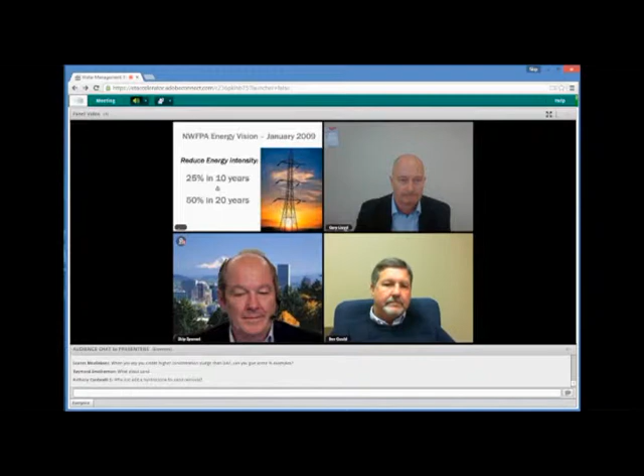Another point about NWFPA: they've taken a really bold step to say they want to reduce overall energy intensity by 50% in 20 years. That means getting double the work for the same amount of energy. This moving-less-water business has a lot to do with turning pumps less, along with moving toward that outcome.

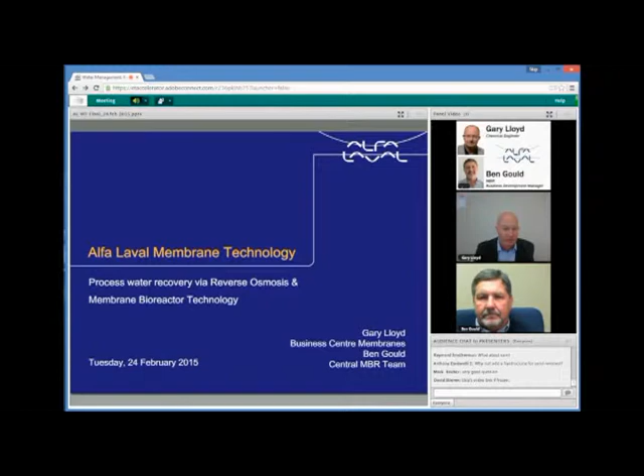Before getting into the actual process examples, I'd like to give some background on the membrane section of Alfa Laval. We actually started up just before osmonics. In fact, in 1965 we were one of the first pioneers to bring membrane technology modules and systems to the world. At that time, it was well before spiral technology was available — it was plate and frame technology. We later became part of the Dow Chemical Company.

We were the European manufacturing headquarters for Dow from 1989 to 1997, and in 2002 we were acquired by Alfa Laval. Today we are the business center for membranes within Alfa Laval technology. Alfa Laval is the largest membrane manufacturer in Europe today, and we've seen tremendous growth over the last few years, moving toward in excess of 500,000 square meters per year of membrane production. So what do we do?

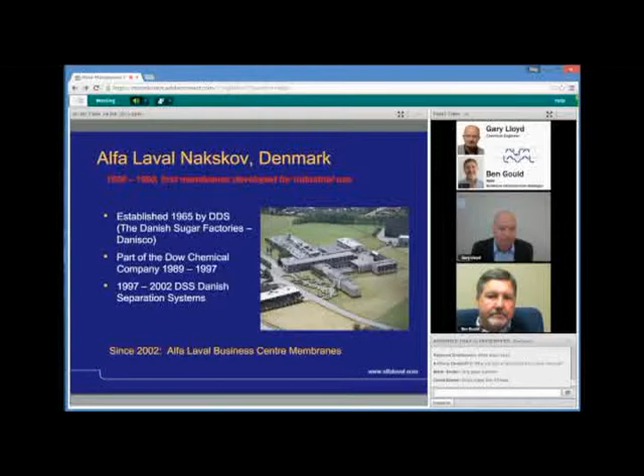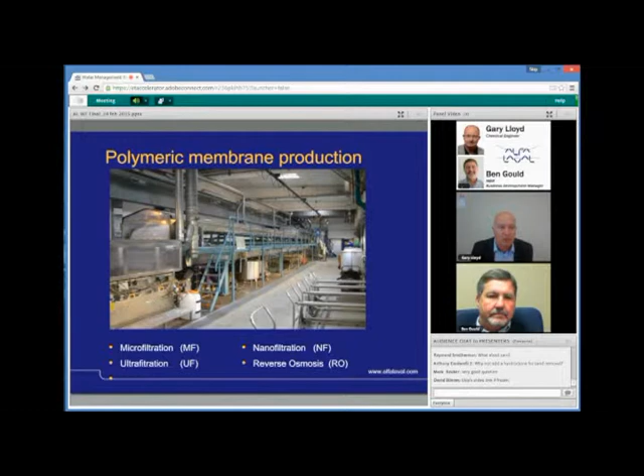I thank Cliff for this because he's already introduced the concept of microfiltration, ultrafiltration, nanofiltration, and reverse osmosis, so I won't go into detail on that here. I just want to point out that we do actually produce our own membranes — this is one of our two membrane casting machines. Having produced the flat sheet membranes, we also have a large focus on converting those into spiral elements, with our own production system in place in Denmark. The key feature with spirals today, as many of you know, is that it's one of the most cost-effective solutions for membrane technology.

A lot of our business area isn't just on the wastewater side or process water recovery, but generally working with customers and their processes and products. We have a big focus on full-fit sanitary design membrane elements, and our UF, RO, and NF membrane spiral elements are USDA compliant.

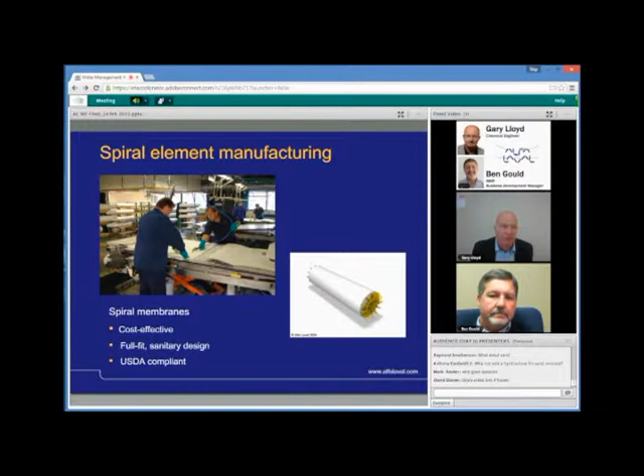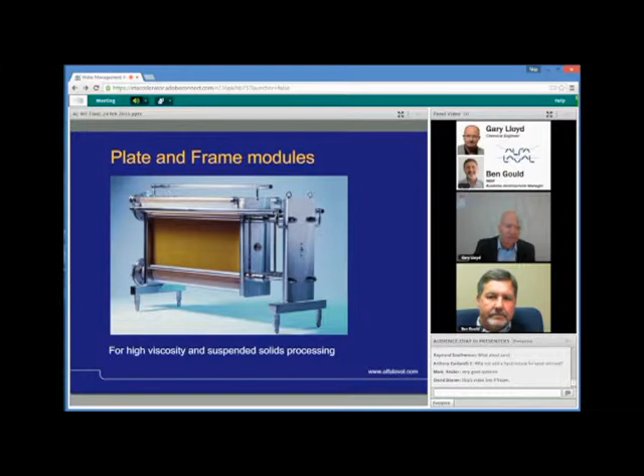Just to recall, the first modules we produced were actually, back in the 60s, something called plate and frame modules. We still use these today, and in fact this is where we're working with streams that contain more suspended solids and also high viscosity operation, so this is still an option available to us.

These are the membrane bioreactor modules, which Ben will cover, and this is for the wastewater treatment plant installations.

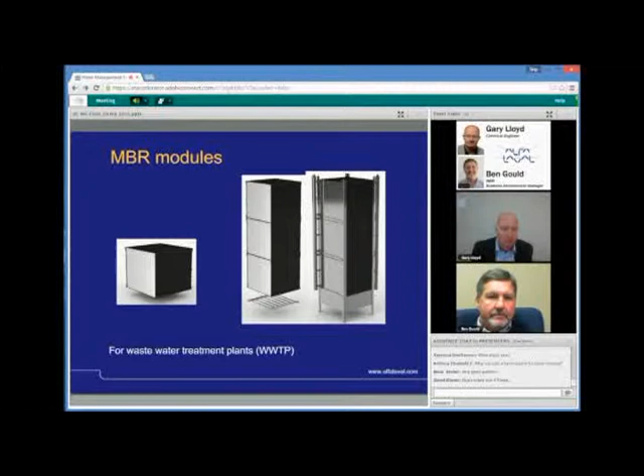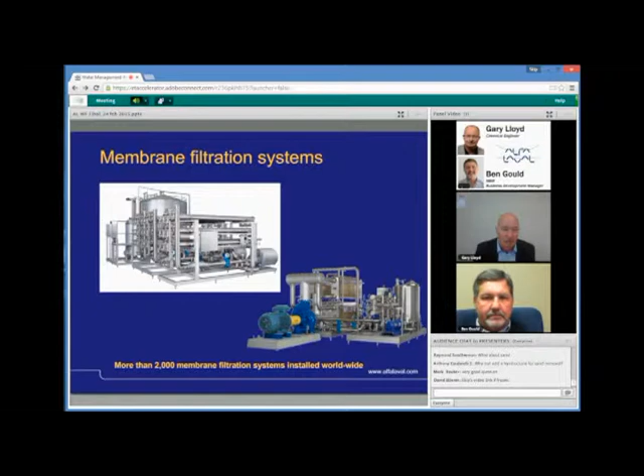And what we have as part of our portfolio, of course, once we have the correct module for a particular application, we can look to build in other Alfa Laval components such as pumps, valves, heat exchangers, and combine that all into a skid-mounted unit, which could either be a plate and frame system or alternatively the more cost-effective spiral system. And we also always like to mention that since our beginning in 1965, we've got more than 2,000 installations worldwide.

I think in the early introductions, one of the questions was, what's new? What I would like to say here is that certainly what we've been looking to develop since our introduction into the Alfa Laval group of companies is how we can combine membrane technology with other separation technologies like high-speed separators, decanter centrifuges, heat transfer equipment, essentially plate evaporators, and looking for the most cost-effective process solution. That could be in terms of reduced energy consumption, reduced capital cost, of course, but also environmental impact.

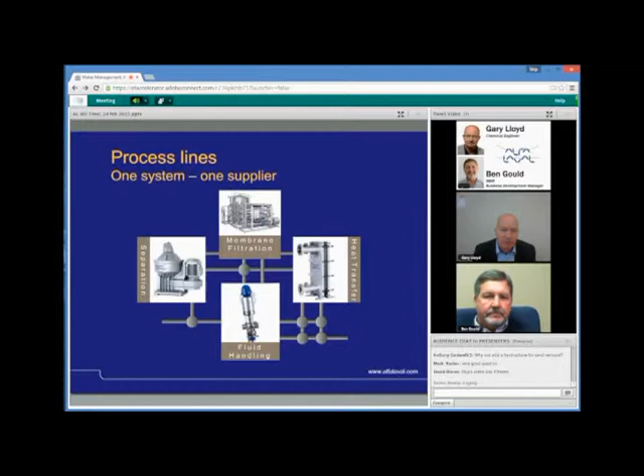So we're working towards being able to recover water and give a much more environmentally friendly solution whilst maintaining low-cost production. One example I'll bring up, though I hadn't intended to mention this with the introductions: when it comes to oily wastewater, this is an area of interest for us because we now have two examples running for about 5 years in Scandinavia, where we have a combination of high-speed separators and decanter centrifuges to remove free oil, and then we bring in a special type of ultrafiltration membrane which is very good at handling emulsified oil, and that can reduce emissions down to less than 1 to 2 parts per million. This is something we're working with more in the oil industry rather than the food industry.

So the example I want to consider today, one of many, is something we've been working on with the baker's yeast industry and producers. This was a start because we realized that baker's yeast producers generally work with high water volumes, and as a consequence produce high wastewater volumes. And because of new environmental demands, we saw some years ago a much greater focus in these companies for water management.

So the solution I want to talk about is that by using reverse osmosis, we can see ways of recovering water for reuse. And of course, as a consequence, that reduces the site water usage coming in and also the site water volumes going out in terms of emissions.

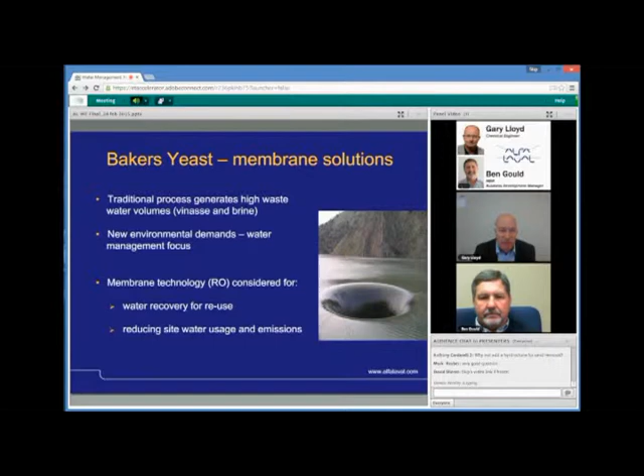So just as a recap to what Cliff said earlier, with reverse osmosis, primarily we are saying that only water will pass. I should stress, however, that there are some small organic components that can also pass with the water through an RO membrane. One primarily would be alcohol, another could be something like acetic acid. In that case, we will often look at a pH adjustment so that we can get a higher capture, a higher retention or removal of acetic acid, which tends to precipitate out as sodium acetate at neutral conditions.

But essentially, and I think Cliff mentioned this again, when we talk about reverse osmosis, we define this as being a very tight membrane which will remove at least 97% of dissolved salts. But I have a small animation here which, if I can just run that, Skip, thank you.

And I'm not seeing it, there we go.

Apart from the smaller salt molecules, you'll see that reverse osmosis will also retain larger molecules like sugar, protein, and amino acids. Many of these larger groups will also be retained. So depending on the process application, we can be sure that reverse osmosis is going to primarily remove all those molecules and only leave us with the water.

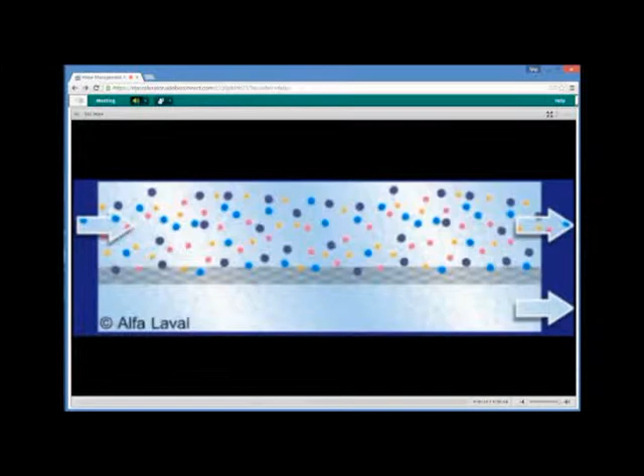So yeah, this is just a very brief, simple animation showing that apart from the yellow molecules, which would be the salt molecules in this case, we're also retaining other larger molecules as well. So as long as we're talking dissolved solids, reverse osmosis will essentially retain and remove everything, leaving essentially clean water to pass through the membrane. Thanks for pointing that out, Skip.

If we think about water removal, another method is to use evaporation. Evaporation is very good, especially with the plate evaporators which we do at Alfa Laval. I know my colleagues would say we have a very efficient method of water removal with plate evaporators. However, with evaporation you have to undergo a phase change, and that involves additional energy. In our case, we're not converting water into steam, which gives us a more efficient method of water removal, and can potentially give up to 40% savings in running costs, which is what we've seen in some good examples.

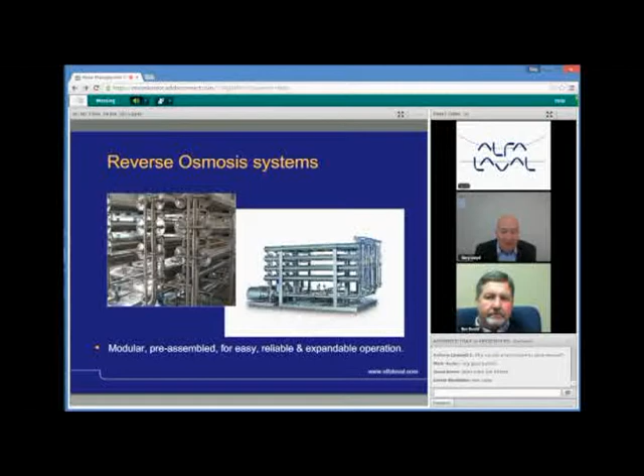When it comes to the reverse osmosis systems we work with, we are offering a skid-mounted solution. These are very easy to fit on an existing site, with a relatively small footprint. They're generally modular and can be expandable for future expansion in process flow rates.

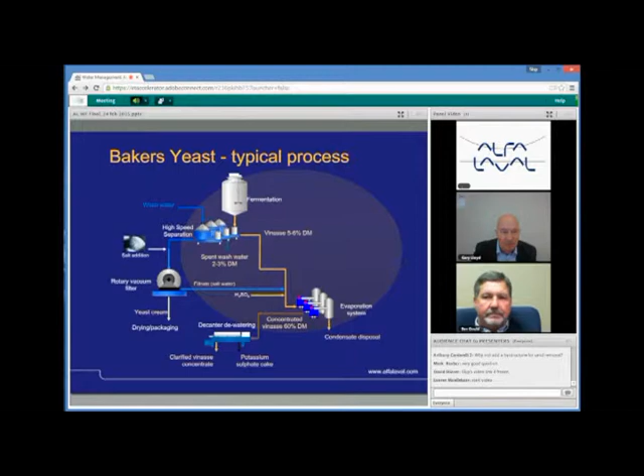If we look at the typical baker's yeast process, this is the overview here. Our focus is not on the production of the yeast itself, which is normally separated by the high-speed separators after fermentation, but we're actually looking at this area, which is essentially the waste streams coming from the high-speed separators. There's two waste streams that we can consider: there's the standard light phase coming from the high-speed separators, but there's also a spent wash water phase.

I'm just trying to get an arrow here, pointer, it's not working for some reason, bear with me, here we go. So as part of this separation, we have to introduce wash water into the high-speed separators, and so we get a secondary light phase stream coming out of the separators. In this example I'm showing, we actually looked to combine those two streams and feed them into an RO plant ahead of the existing evaporator.

To put some figures on those streams, typical capacities would be between 40 to 80 cubic meters an hour, and I've also translated them to gallons per minute. In this example, we would be looking to do somewhere between a 1.5 to 2 times concentration. This gives us 33 to 50% water recovery.

Something else that was pointed out earlier is with reverse osmosis, we have to be able to pause the production process typically for 2 to 4 hours every 24 hour day period. To allow us to do that, we will often consider a special design system which allows us to do what we call sequential cleaning of individual loops in the system, which allows the plant to run 24 hours per day. Typical energy consumption is around 6 to 8 kilowatts per cubic meter of water recovered, or between 0.023 and 0.03 kilowatts per gallon.

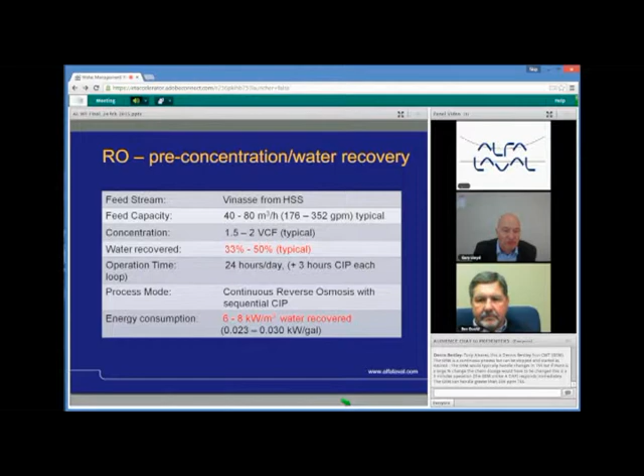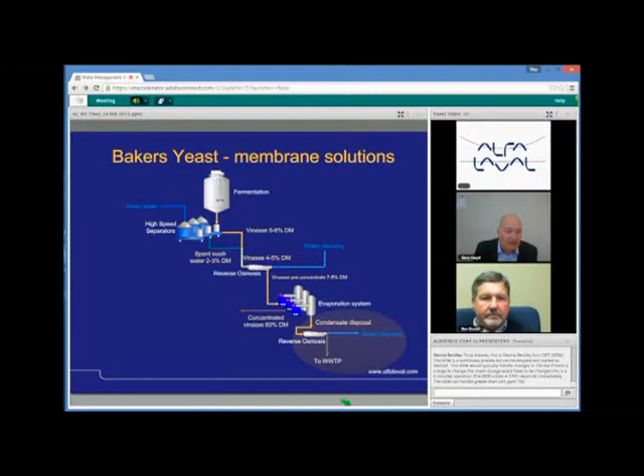We also have another opportunity to bring in reverse osmosis, and this is actually after the evaporator. The condensate itself can also be a pollution problem, and we can also look at doing a reduction, a concentration. In this case, feed capacities could be anywhere between 50 to 100 cubic meters per hour. We can do 10 to 20 times concentration, which means we can typically recover in excess of 90% of the feed as pure water for reuse.

Again, as before, we can consider a continuous reverse osmosis running system. Because the evaporated condensate is generally a little cleaner than the earlier stream, this allows us to run with slightly more efficiency on the system, at 4 to 6 kilowatts per cubic meter of water recovered.

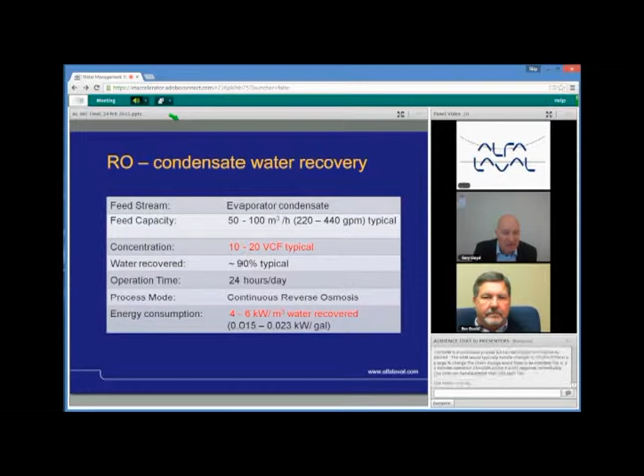I've just combined this as a final summary in terms of flows. You can see here that we've got the two light phases coming together. This was an example we did for a project in Asia, and I'm sorry for the metric units.

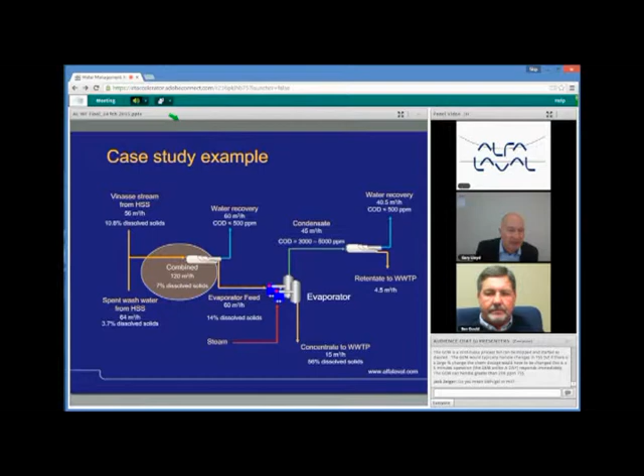We had totally 120 cubic meters per hour of water going into the RO plant. With a 2 times concentration, it gives us a water recovery with a COD level of less than 500 ppm at 60 cubic meters per hour. Then if we look at what we can also pull off the condensate, we have an additional 40.5 cubic meters an hour water recovery. So of the 120 going in, we're actually able to recover water of more than 100 cubic meters per hour.

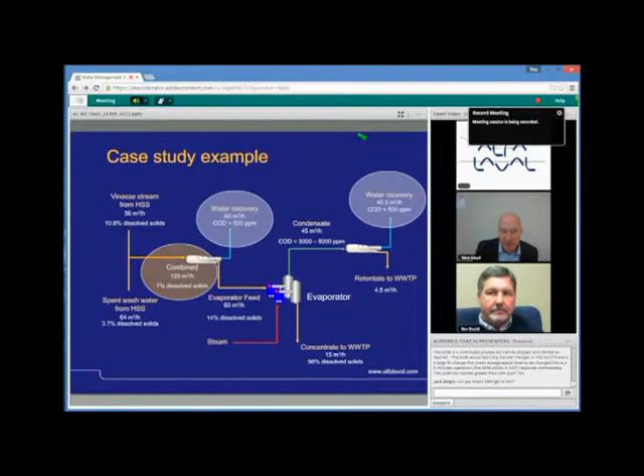I point out that COD levels here are shown as typically less than 500 ppm. We can, by doing a double pass on the RO system, reduce that further down to potentially less than 200 ppm COD.

So to summarize, with the RO technology, one of our main features, we're offering sanitary RO membrane solutions, not just standard water elements. With sanitary RO membrane solutions, we offer full fit sanitary elements, which essentially allows and promotes the flow of liquid through the module, so we don't get any stagnation or dead legs or dead flow periods, and this ensures we don't get any microbiological activity in the process.

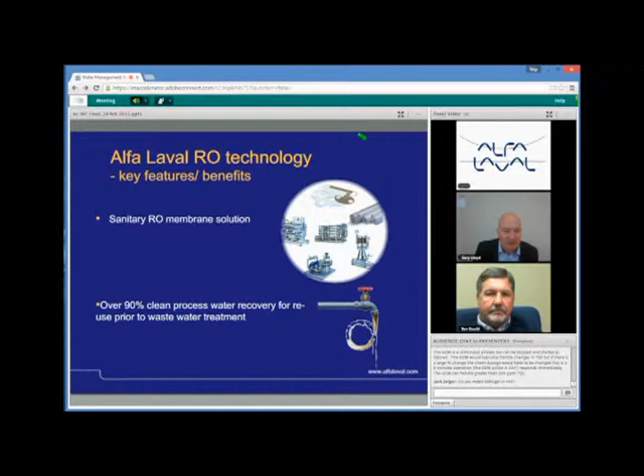As I've already shown, we can expect to get over a 90% clean process water recovery for reuse prior to the wastewater treatment plant. Ultimately that gives us savings in process water consumption and water disposal costs.

Now I'm going to hand over to Ben, who will take us into the next step, which would be to take that concentrated stream that we've taken from our RO systems, and we're now feeding that into the wastewater treatment plant, where Ben will look after the membrane bioreactor principles.

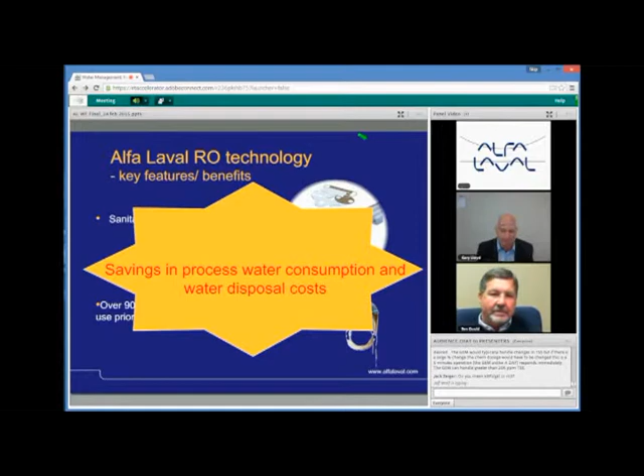As Gary mentioned, we're now going to talk about the membrane bioreactor technology. The first thing I wanted to briefly discuss is that I work with the process water and wastewater group for Alfa Laval, and we have sludge solutions, and we also have wastewater process solutions.

On the sludge side, we have thickening and dewatering with belt presses, centrifuges, and screw presses, and we also have heat exchangers for sludge heating. On the wastewater process side, membrane bioreactors, tertiary cloth media filters, sequential batch reactors, and aeration systems. What we're going to focus on today is the membrane bioreactor technology.

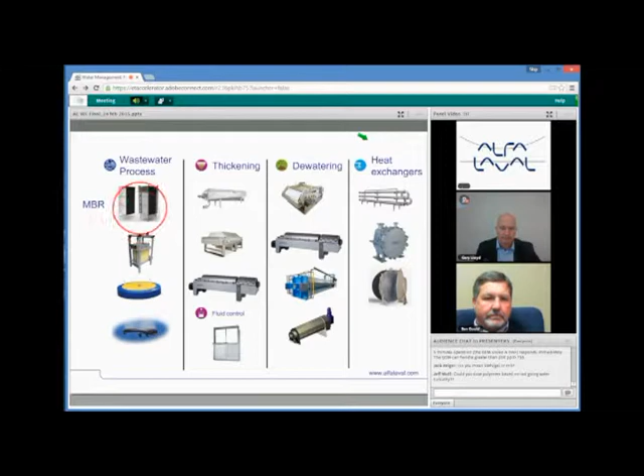The first thing we really need to ask ourselves is, why would we even use a membrane bioreactor? I've come up with a few reasons here that I think most people would agree with. It is truly a one-step biological wastewater treatment and membrane filtration process. This makes it have a very compact footprint, and it also produces reuse quality water in one simple step.

This reuse quality water can be used for irrigation, or cooling towers, or it's actually ready for RO feed water. That's where the benefit is here, that it would remove the suspended solids and give us cleaner water going into the RO, so we don't get any premature fouling of the RO membranes. That's exactly right.

So if the facility does want to run reverse osmosis, you can go from your wastewater to the MBR to the RO, and you are good to go. It also will reduce your fresh water and sewerage cost if you reuse that water.

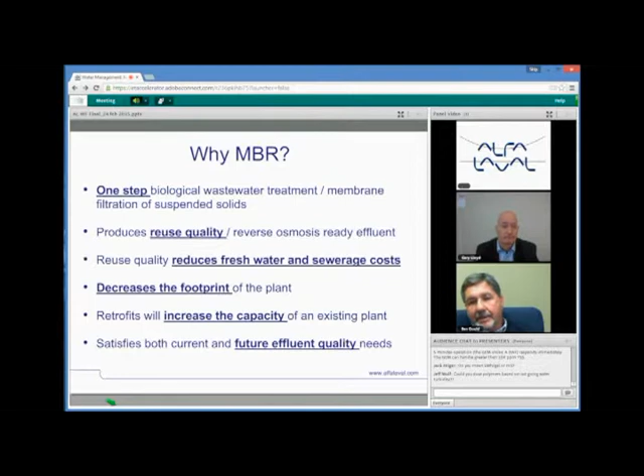If you want to retrofit an existing activated sludge plant with membrane bioreactor technology, you can get approximately twice the flow capacity out of that plant if you go to the membrane bioreactor. So it's also a good retrofit option. From an effluent quality standpoint, it meets future needs and also current needs. So those are what I see as the main reasons to buy the MBR.

We are focusing on the food and beverage market. If you look at the entire industrial MBR market for the United States, the food and beverage portion is about 26% of the total market.

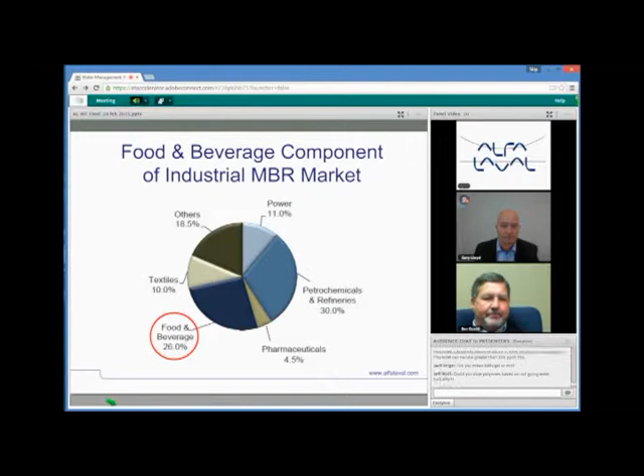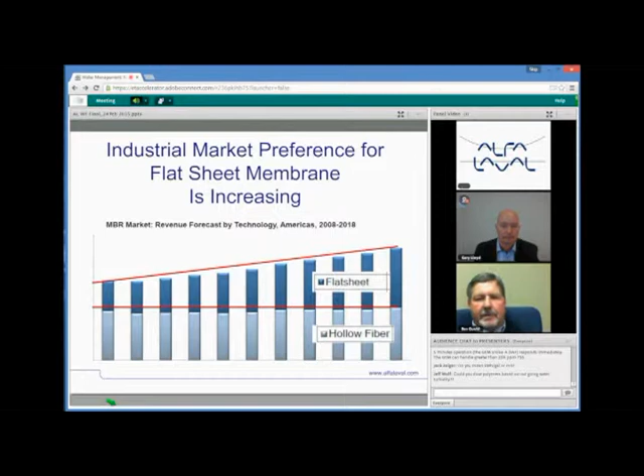If you look at the preference for flat sheet versus hollow fiber membranes, hollow fiber membranes are a more traditional product. Flat sheet is a bit newer, but the industrial market preference for the flat sheet membrane is definitely increasing, and the hollow fiber preference is flat or perhaps going down.

The effluent quality that you get from the membrane bioreactor is really one thing that sets it apart. From the membrane filtration standpoint, you're going to get less than 3 ppm of total suspended solids, turbidity less than 0.5 NTU, and a multi-log reduction of both bacteria and viruses. From the biological process perspective, BOD is typically going to be less than 5 parts per million, and COD, nitrogen, and phosphorus numbers coming out of the MBR are really going to be based upon the biological wastewater design.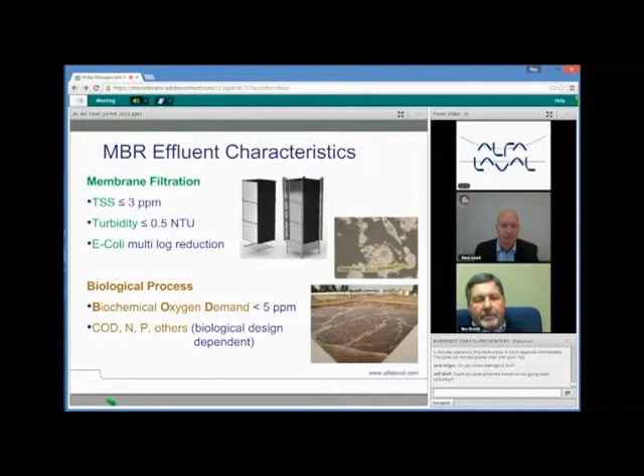If you look at traditional MBRs, they essentially replaced a gravity process for liquid-solid separation, which is a clarifier. This was replaced by large pumps and much more intensive screening. A typical wastewater plant now may have a 6-millimeter screen, and a traditional MBR has to have between 0.5 and 2 millimeter screening. So you've added a lot of mechanical complexity to the process as opposed to conventional activated sludge.

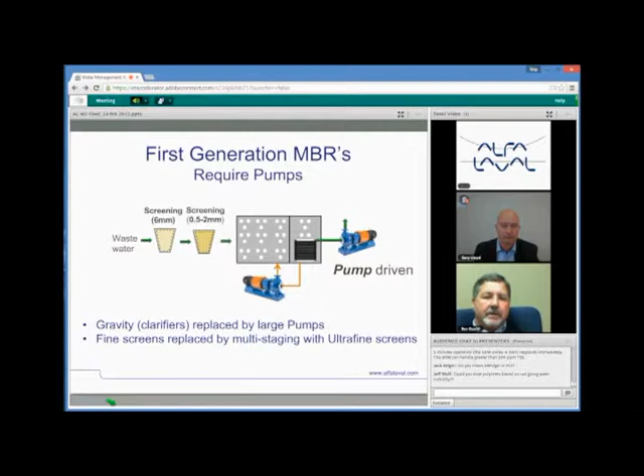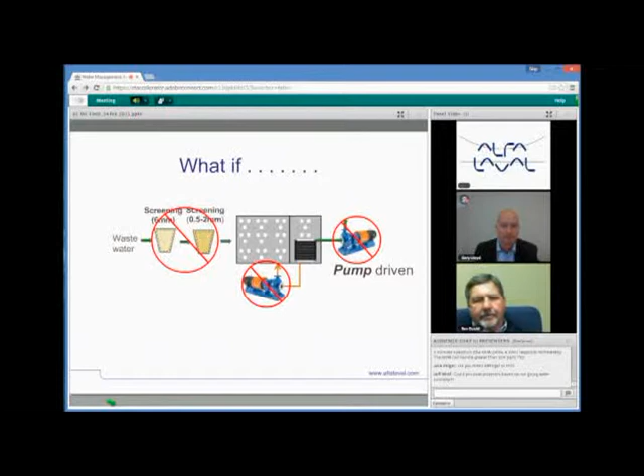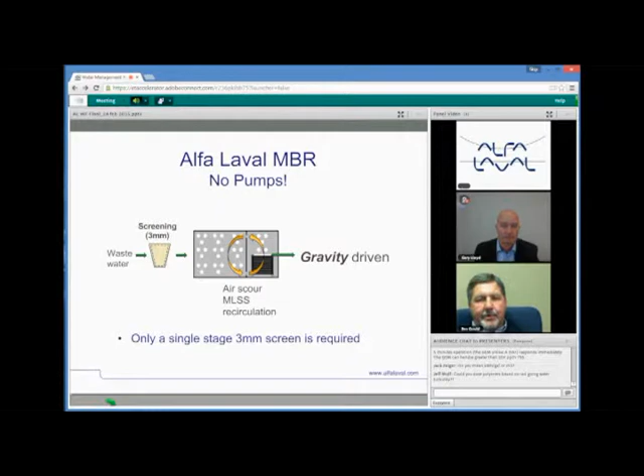Well, what if you could eliminate a lot of that complexity and go back to a gravity-driven process, which is exactly what Alfa Laval has done. We do not need pumps for permeation, and we only need a one-stage screening up front, around a 3-millimeter screen. We also do not need multi-Q mixed liquor recirculation pumps. If you look at what the competitors do, they have to have a multi-Q mixed liquor pump that will pump from the membrane chamber to the aeration chamber to try to equalize the mixed liquor concentration in the two.

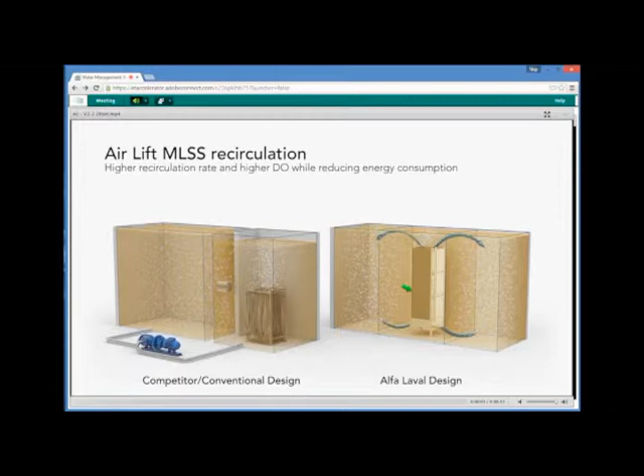We can go back to the normal slide. Thank you. There we go. So we effectively can get up to 8Q mixed liquor recirculation without recirculation pumps at all.

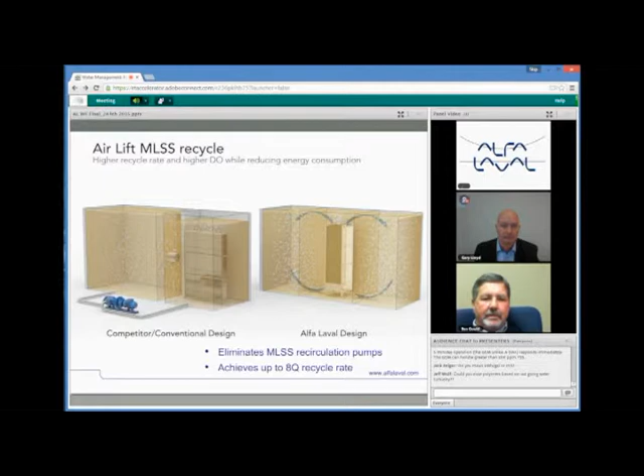The key features and benefits of the Alfa Laval MBR are the direct result of a very ultra-low pressure drop membrane bioreactor technology. We can operate our MBR in 4 to 16 inches of water. That's all it requires, and that enables us to do gravity operation, which is going to save you a lot of capital, maintenance, and energy costs. We don't need permeate pumps. We do not need backflush pumps either, and we don't need mixed liquor recirculation pumps.

The other effect of the ultra-low pressure drop is we have very low fouling rates, so we can save up to 70% on membrane cleaning costs. In other words, much less chemical consumption, much less labor costs. Also, our membrane modules are not required to be periodically lifted out of the tank and manually cleaned. We also do not require separate soaking and cleaning tanks. And if you look at the labor and chemicals associated with membrane maintenance, we have reduced safety, health, and environmental costs.

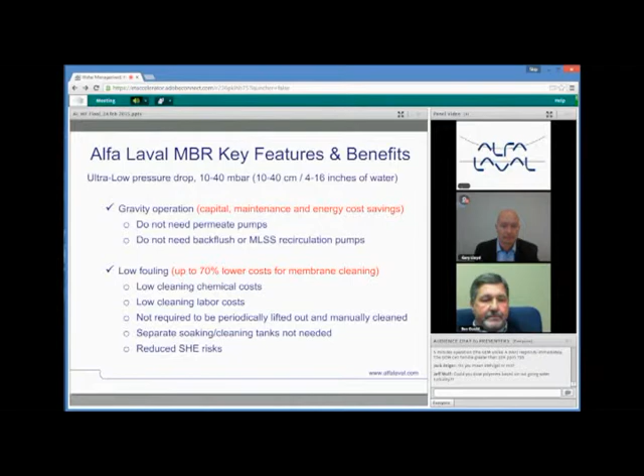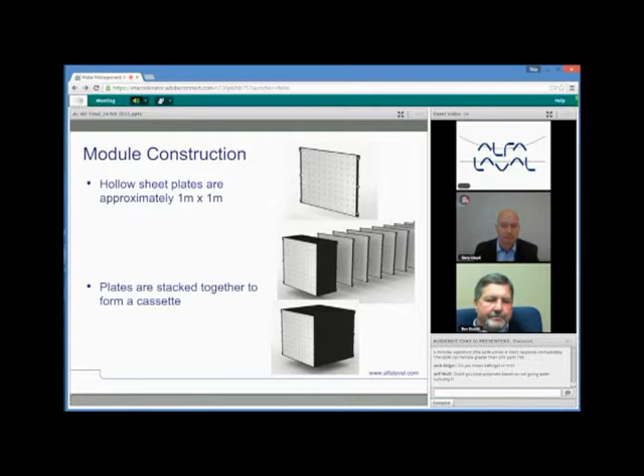As far as our module construction goes, we have a PVDF membrane which is bonded to a hollow core polypropylene panel, and the hollow core panel is the permeate carrier. The PVDF membrane is bonded to both sides of that polypropylene plate, and then we stack the plates together and form what we call a cassette. Each cassette is approximately 3 feet by 3 feet by 3 feet in dimension. We then stack the cassettes 1, 2, or 3 high, depending on the flow rate that you want and the depth of your tanks.

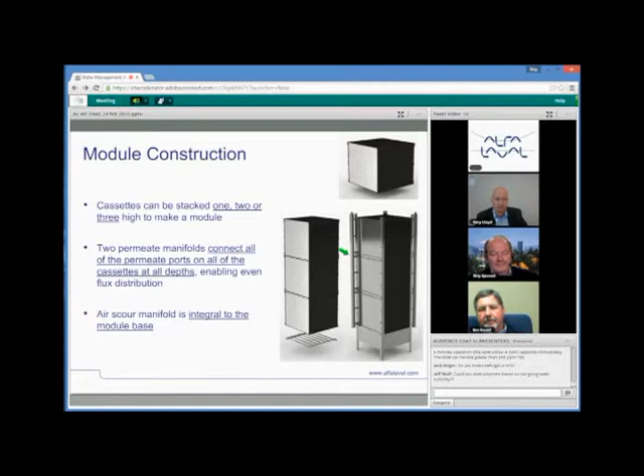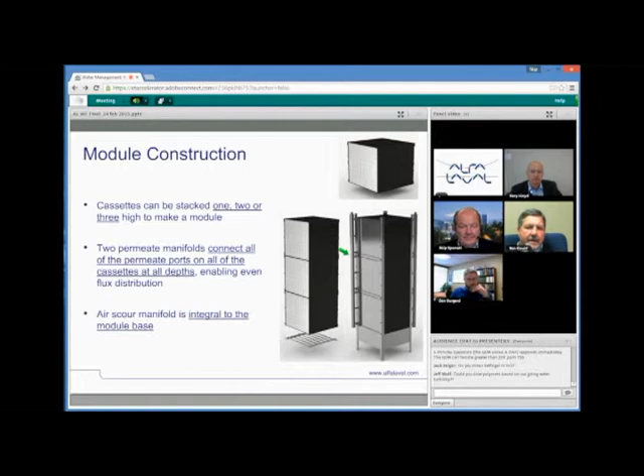One thing I want to point out here is that if you look at the permeate ports on the module, we collect permeate from all depths of the membrane itself, so we have very even flux distribution across the membrane surface. We also have an air scour manifold at the bottom for air scouring.

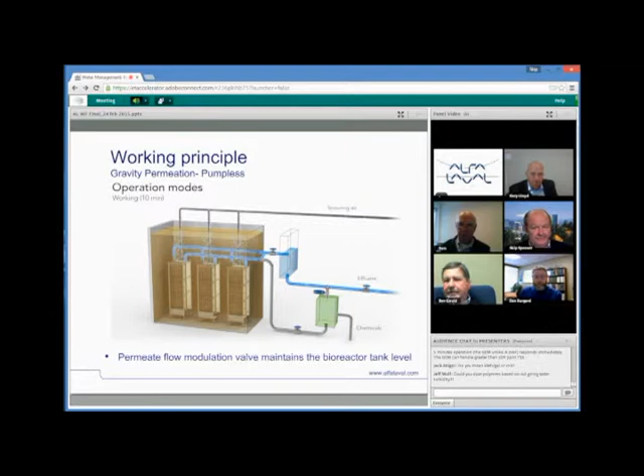Thank you. Hey there, Ben. Yes, you probably noticed that the panel and I are on the line. It's 5 minutes before the hour. We want to make sure there's time for questions, so can you wrap in a minute or two? I can do it in 1 minute. You're the man, go for it.

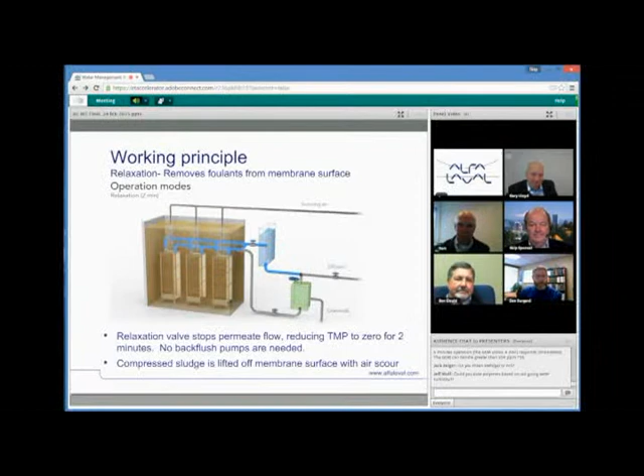All right, next animation please. And the next operating mode that we have is our relaxation mode. All we do is we stop the permeation with our relaxation valve, and that converts the transmembrane pressure drop to 0, and so we're able to scour off any suspended solids that were clinging to the membrane surface, even with an ultra-low TMP. And we do not need backflush pumps. We don't have a backflush mode. All we have to do is stop permeation.

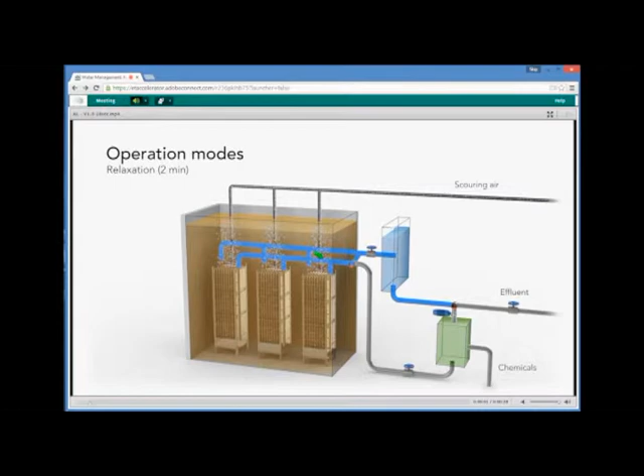Okay, back to the slide presentation. Essentially the last slide, I'll get it done quick. Let's go to the animation.

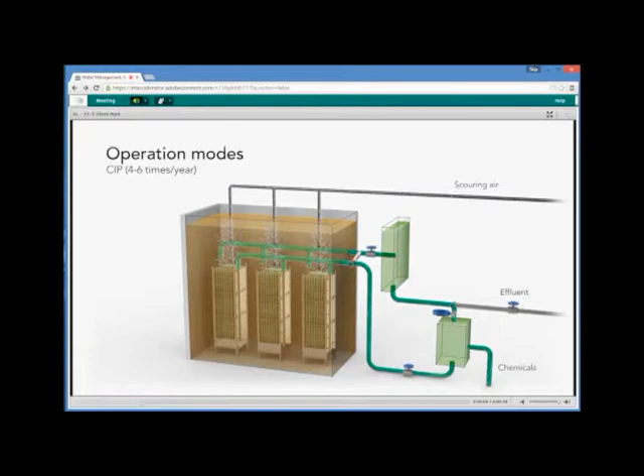Since we do have such low fouling rates, we typically only have to clean 4 to 6 times a year. The most common cleaning chemical is sodium hypochlorite at 500 ppm. In this case, we actually recirculate the cleaning chemical in the plate and slowly through the membrane, so we get an extremely efficient cleaning of the entire membrane surface. And this is where we can save up to 70% on cost for maintenance, because we just don't need to clean very often. Back to the presentation.